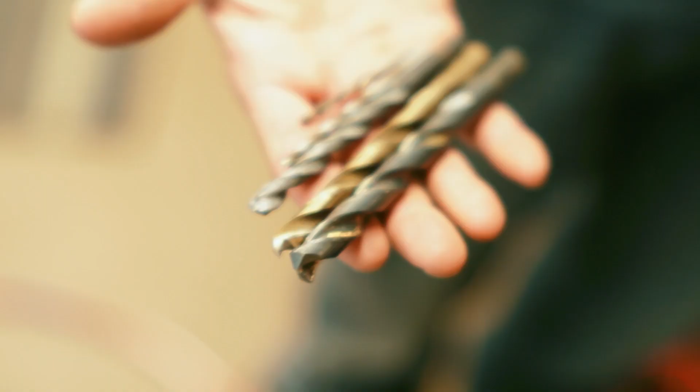Before we get into hanging it on the wall and taking all of our measurements, I want to talk about what tools you're going to need. The basic things that you're going to need are a drill. The drill is going to need drill bits, and we're going to use them for pilot holes for hanging the brackets and the UniStrut and this kind of thing. We'll get into the size of the pilot bits that are required and the torque values and all of that stuff later. But additionally, we're going to be using a voltmeter. You got to have one of those on every project like this.

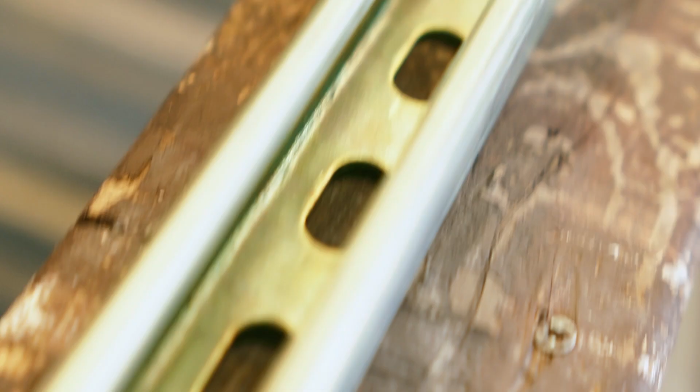We're going to be cutting UniStrut, so I'm also going to be using a reciprocating saw. And I've got a couple of files, rasps, and a Dremel tool for neatening up any burrs that I might end up with on the edge of cutting the UniStrut, because let's face it, a reciprocating saw gives you far from a clean cut. But it's going to be the quickest way to get this thing into 2 even pieces so that we can start taking measurements and getting them on the wall. We're also going to be using a punch-out tool to put the knockouts into the gutter so that it lines up with the knockouts on the inverter.

Additional things that you will need include screwdrivers with various bits. We've got a couple of hex screws associated with putting the gutter together, and a handful of flathead and Phillips bit applications on the various breakers, terminals, bus bars, and that kind of thing. So you want to be sure you have a full socket set. You want to have a screwdriver set. You want to have a drill with your drill bits. We're going to look at a couple of different ways to measure out and find studs, but a stud finder is a good tool to have in your kit.

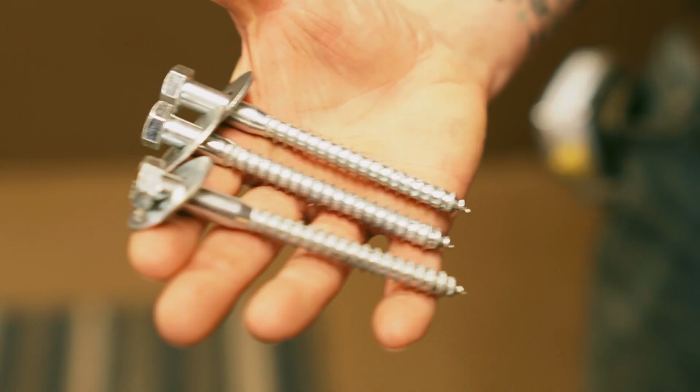In addition to the tools, there's also going to be some hardware that we need to account for. The hardware to mount the UniStrut onto the studs of the wall, and then the hardware to mount the inverter and battery brackets onto the UniStrut. We're going to be using lag bolts for tying in to the studs, and these are 3-inch lag bolts because we're using 2x4 studs as the wooden framing member that we're tying into. We don't want for our lag bolts to go all the way through the stud and pop out the other side. We want it to get a good amount of what is called purchase.

You can see all of this threaded portion will be inside of the wood. This unthreaded portion accounts for the thickness of the sheetrock, and so the total length of this accounts for the sheetrock plus the 3 inches of thread embedded into the stud. So these you need to pick up at a hardware store.

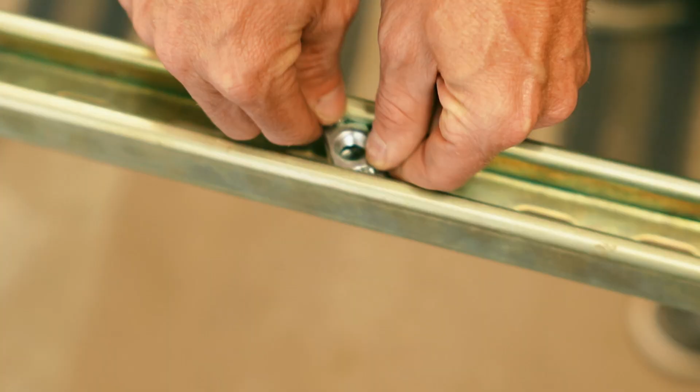In addition, the mounts that we're using for the UniStrut, these are called strut nuts. These ones have a spring clamp on them. And these are cool because you can place them anywhere into the UniStrut once it's mounted, and they push down with the spring and they rotate 90 degrees and get locked into place. So now we can set custom widths on where we're going to be mounting.

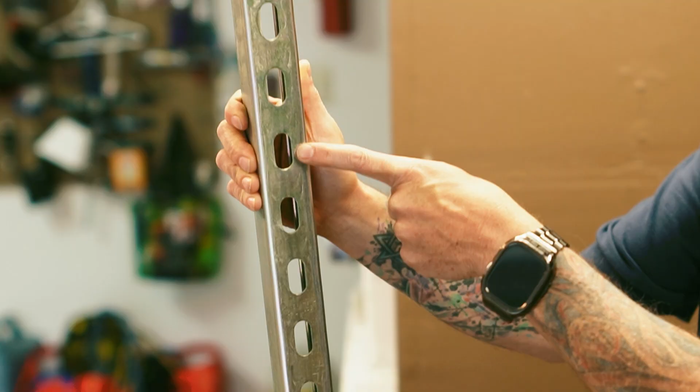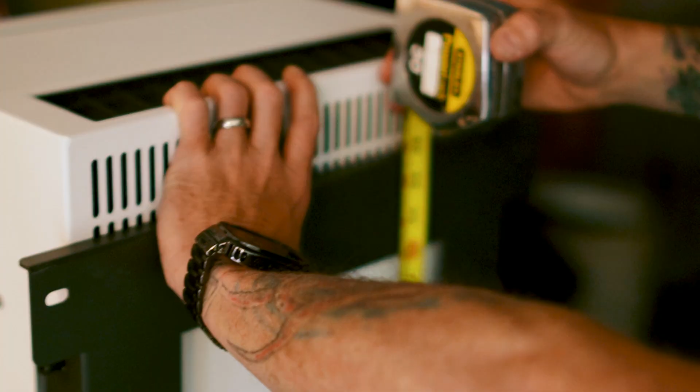As far as how far apart these UniStrut nuts will be, we would use our mounting template. We've got one that came with the inverter. We've got a mounting template that came with the battery. And ultimately, we're just going to line these up with the existing mounting holes on the inverter mounting bracket and on the battery mounting brackets. Whether or not they're directly over a stud won't matter because we're tying into the UniStrut.

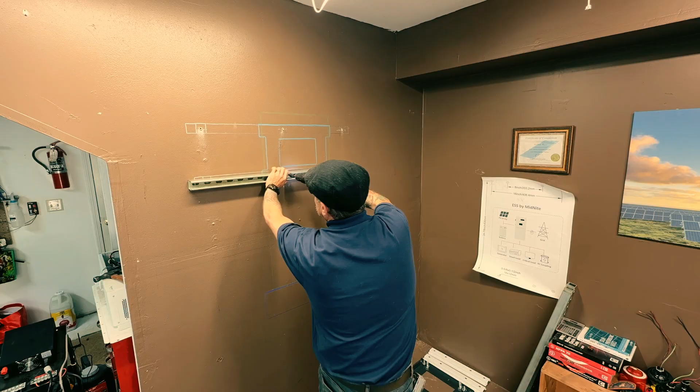We're going to use a 36-inch section of UniStrut so that we can tie into 3 studs in order to hang the inverter and the battery. We're going to try to hang it on 3 structural members instead of 2 to more evenly distribute the weight. So that covers what we need to have for tools. We're ready to get this thing hung on the wall after a few measurements, but we need to address the elephant in the room.

These pieces of UniStrut need to be cut in half. So I'm using a reciprocating saw with a blade that's rated for metal, and I'm using a new blade because I'm going to try to make as clean of a cut as I can. Reciprocating saws aren't always the cleanest of cuts, so we're going to be prepared to file it down. We may need to make some adjustments. I've got the measurement right in the middle, so let's drag it outside and cut her down.

As a reminder, these pieces of UniStrut started out as 6-foot chunks, so 72 inches. What we're gonna do is cut them in half so that we have two 36-inch chunks for the inverter. We're gonna do that again for the battery.

And the reason is we measured out our studs in the wall as being 16 inches on center. So if we're gonna go 16 inches to the first one and another 16 inches to the third one, that's a total of 32 inches that we've got to span between 3 studs. And this will give us a couple inches on either side. Before I get started, I want to point out I've got my personal protective equipment on, including gloves and eye protection.

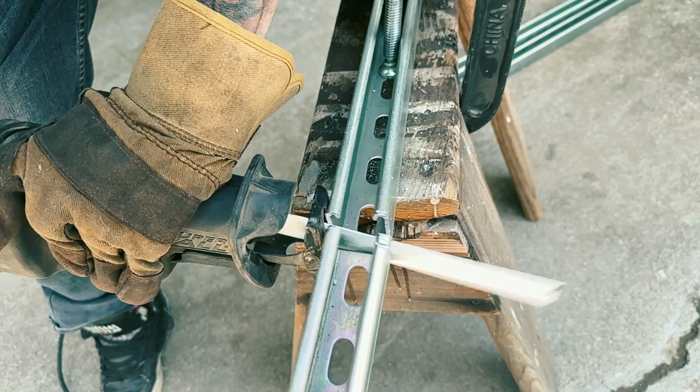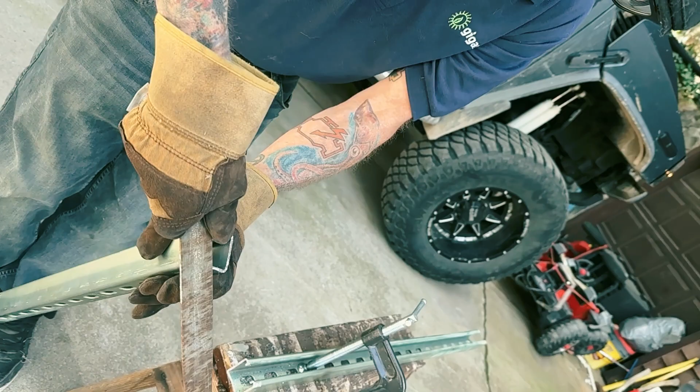Use a file to clean up the ends of those so you don't accidentally get a metal splinter or cut yourself, and clean it up off of your driveway or your garage floor so you don't end up with a metal splinter in the bottom of your foot. Now we've got our UniStrut cut down into four 36-inch pieces, two 36-inch pieces for each piece of equipment.

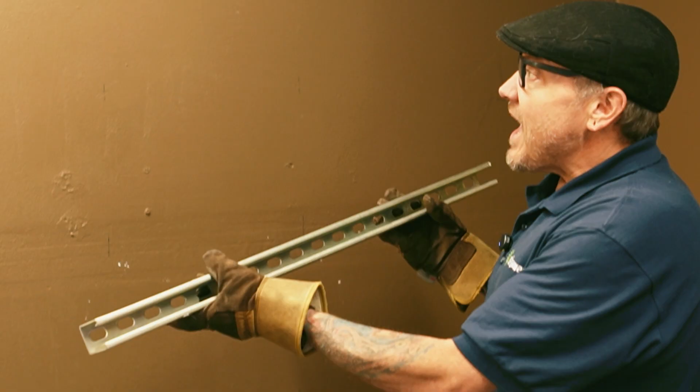So what we're going to be looking to do is to find where our studs are and be able to mount our UniStrut into the studs in a way that the inverter's height and its knockouts and the gutter and everything will line up with the battery, which will be mounted over here.

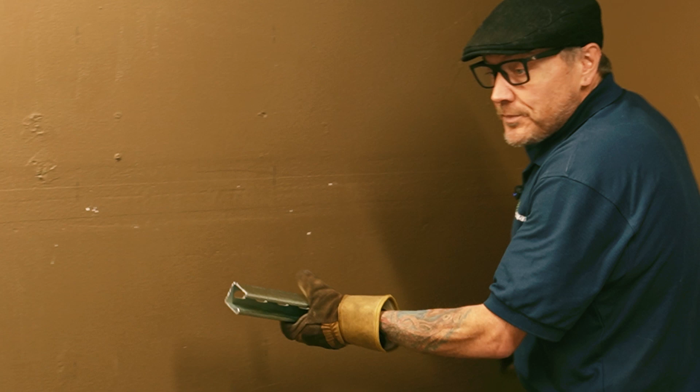So what we're gonna do now is talk about how to find studs and how to attach UniStrut into the studs, including the size of the attachment hardware and the size of the pilot drill bit we're gonna need. Most of you probably already know how to find a stud, but I just wanna go over a couple of common techniques for doing so, so that we're all on the same sheet of music and there's no question.

The standard is to go through and do the old knock test, right? It's gonna be more hollow where there's no wood behind it. If knocking isn't your strong suit, there are a couple other ways. The one that's way more basic is just to use a magnet. I have this little piece of a neodymium magnet, which is just a really strong magnet. The sheetrock is nailed into the studs with steel nails, so we can find them with a magnet. And that will also give you a really solid idea of where a stud is.

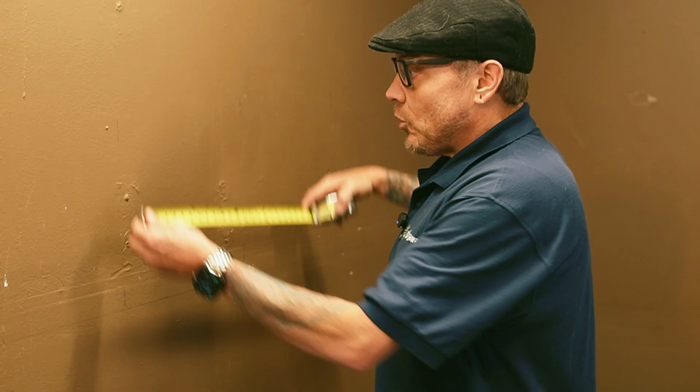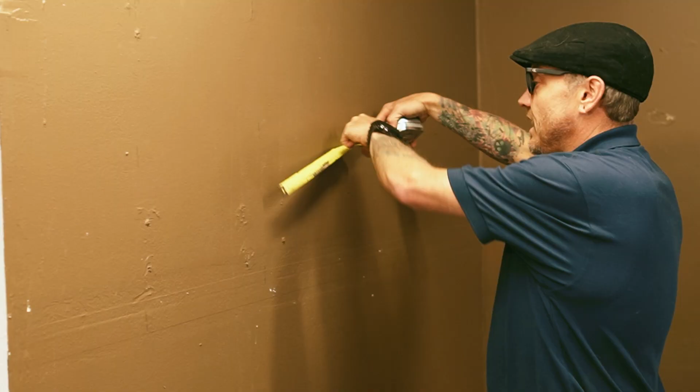We can also get in and measure. And as I mentioned, we're gonna be 16 inches on center here. This is not 16 inches from the edge. We're about 13.5 inches in here. So it makes it even more imperative to be able to find with almost laser precision where your first stud is, because from there, you should have pretty laser precision with where the next stud will be every 16 inches like clockwork. But getting in and finding exactly where they are can take measurements and a little bit of knocking.

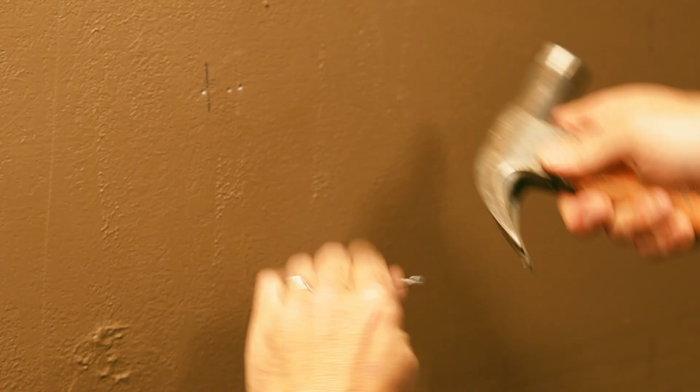What I will do sometimes is use a small finish nail or some kind of a small poking device to probe around where the stud is. I'm not a huge fan of marking up the walls. A person could go through and patch these once they find it. We're gonna be covering this with UniStrut, so I don't think that it's a big deal. In my mind, it's more important to know the direct center of this stud than whether or not I had drilled a couple of test holes to make sure I knew where it was.

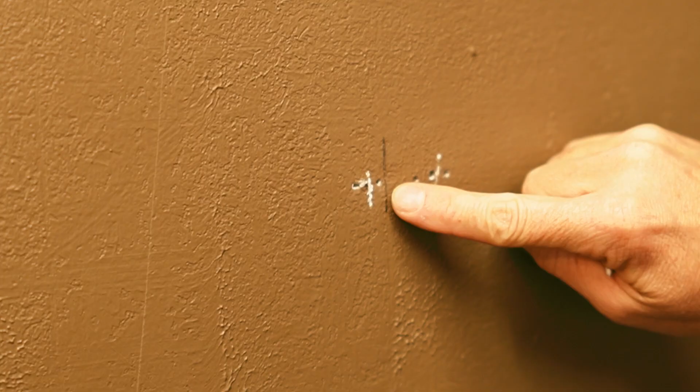Now I know exactly where this stud is, one side to the other, and I can make a pilot hole directly in the middle. Now, if you'll notice this initial mark that I made in pencil, I measured it out, I found the magnetic nail, and still, I was not dead on. If I had gone right here with my lag bolt, would I be in the center of this? No. Now we need to make this measurement in a couple of different places, because just because we find the center of the studs doesn't mean we know where vertically we're going to need to place the UniStrut in order to have the inverter be where we want it.

The inverter, as I mentioned, we want it to have the gutter that we're going to attach interface with the knockout on the battery. Some other considerations are how high off of the ground do we want to have the inverter display, for example. This is purely aesthetics, but this is where we get in and decide what our project is going to look like going forward for the entire life of it. So you have a lot of freedom here to be able to get in and really make this exactly what you want. So take time and do it right.

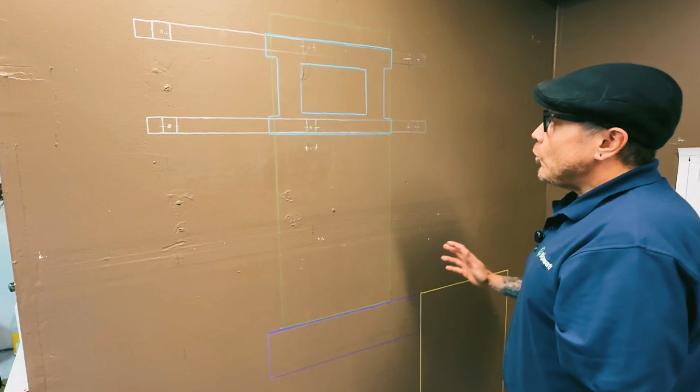I had mentioned that we needed to take a lot of careful measurements. Well, I've gone ahead and done that. With the template in place, we're going to be able to go through and just lay equipment down over the top of it. Now, this isn't something that you will normally see installers doing. I've done this for your benefit so that we can get in and try to visualize how everything will go together before we do it, so that we set better expectations for ourselves on what the process will look like as we're going through it.

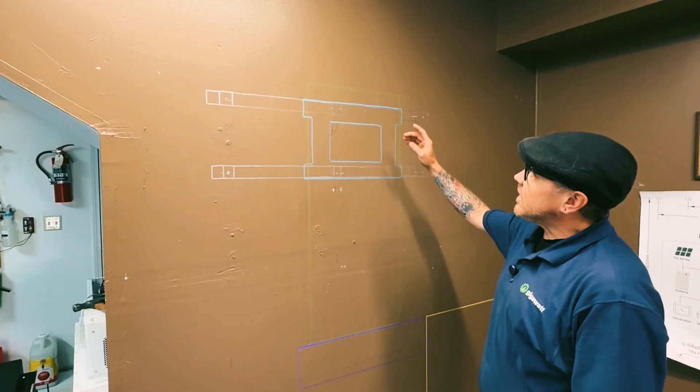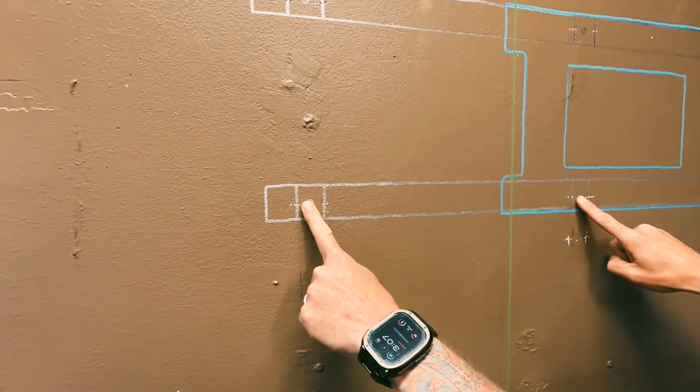I've taken and marked out where our two 36-inch sections of UniStrut are going to go. I've done these in silver. I've also put on the MidNite All-in-One inverter mounting bracket. You can see that the studs that we're going to be attaching into, 3 of them for each piece of UniStrut, I've already gone through and found where the exact center of them is. You can see my little pilot holes kind of around each one.

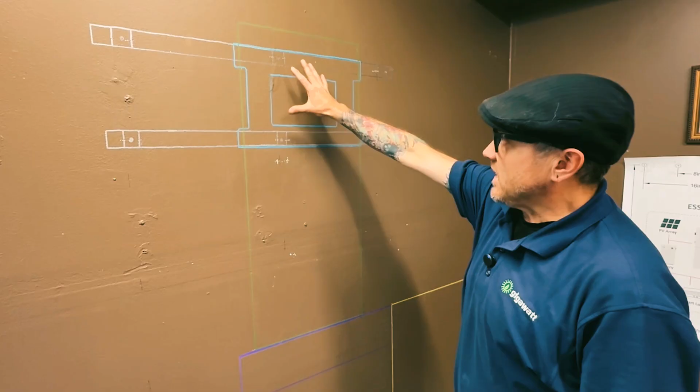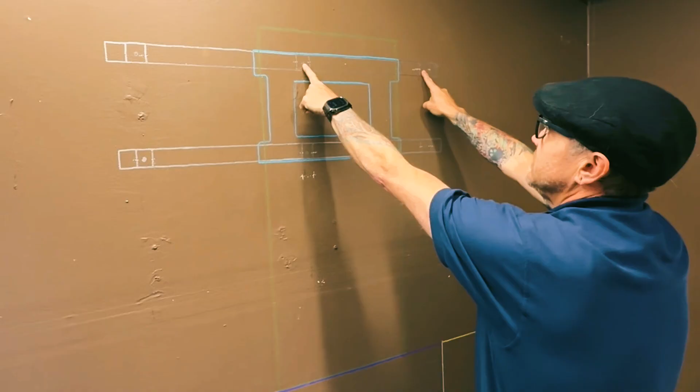One thing that's important to note here is we're going to be tying into these 3 studs, but for where we want the inverter to be with respect to where the battery is going to sit, it's not lined up with where the studs are, right? We want the inverter bracket to be here so that it lines up with how we want our wall to look. The inverter bracket has the pre-drilled holes here, right? So if you were going to tie in, you would have to either have your inverter be here on these 2 studs or over here on these 2 studs. So another thing that the UniStrut does is gives us the ability to be flexible in where the inverter is placed on the wall.

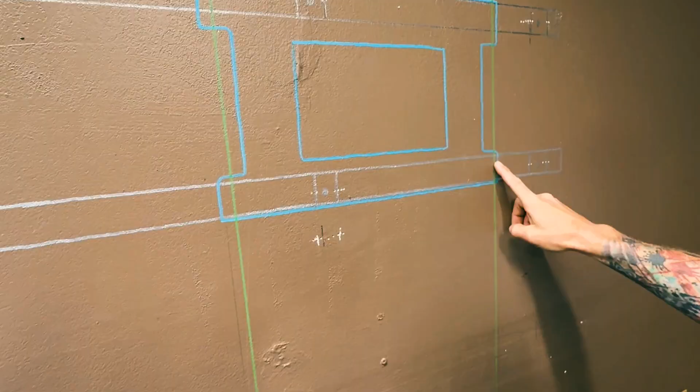Above the MidNite All-in-One inverter bracket that we have here in blue, you can see 2.5 inches above that is where the top of our inverter is. So we used the dimensions of the inverter and laid it out in green here so that we have a solid idea of where the inverter is physically going to sit. Down here in white, I've put in where the gutter assembly is going to go. I don't want for it to be an open gap where you can see the wires. The intent here is for the battery and the gutter to be essentially as seamless as we can get. Fit and finish is what I'm going for here.

And the same is true of the bottom of the inverter. Once we get the knockouts in the gutter for the inverter, we'll need to then consider the knockout from the side of the gutter and into the battery. That's going to give us the ability to have all of our wiring between the 2 things be concealed.

If you're a do-it-yourself person, there's a good chance that putting together a gutter assembly is going to be more cost-effective than buying the conduit. If you've never done it before, buying the conduit bender, wasting a couple sticks of pipe, learning how to do it and bending them to the wrong angle and not being able to bend them back without weakening the pipe. There's an art to conduit, and there's going to be an art to getting this gutter fit and finished as well. And it's important to know what the options are. So the gutter is going to be what we're going to focus on once we get the inverter and the gutter on the wall, battery, then we're going to be doing the wiring.

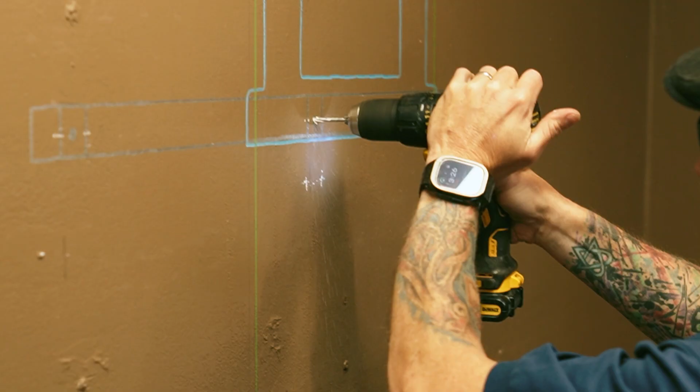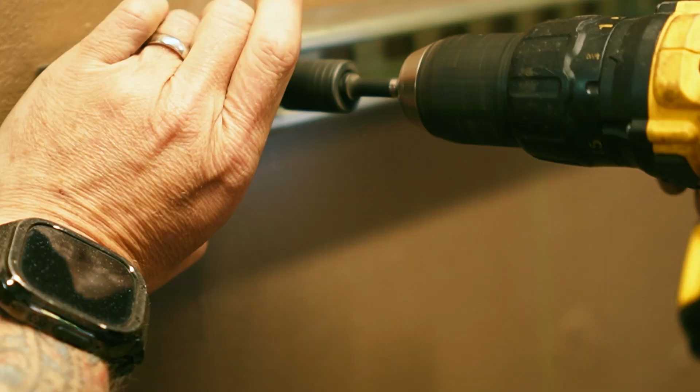Now that we've got the pilot holes drilled, we're ready to put the UniStrut in place. Before I tightened everything down, what I ended up doing is taking the inverter mounting bracket and attaching it onto the UniStrut while the UniStrut was still a little bit slack from the wall. And so I dry fitted the bracket onto there, and it allowed me to have the UniStrut be in the exact configuration it needs for the bracket.

From there, I was able to tighten up the lag bolts on the outer sets of studs. And then of course, I have to remove it now so that I can tighten down this inner stud, upper and lower, which I've done. And now we're gonna reseat our strut nuts and attach our inverter bracket on and get ready to hang the inverter.

3 of the bolts fitted in pretty nicely. This 4th one is a little bit off. Despite taking careful measurements, things don't always lay out exactly as you'd like them. I'm using a clamp to try to line up the threads.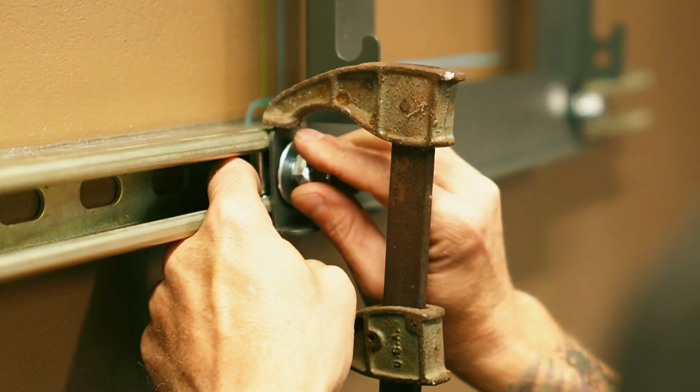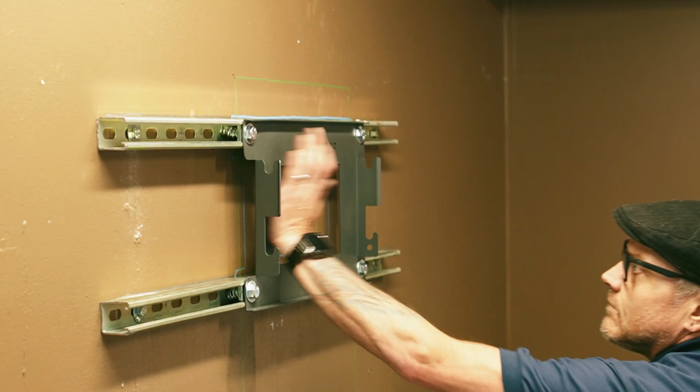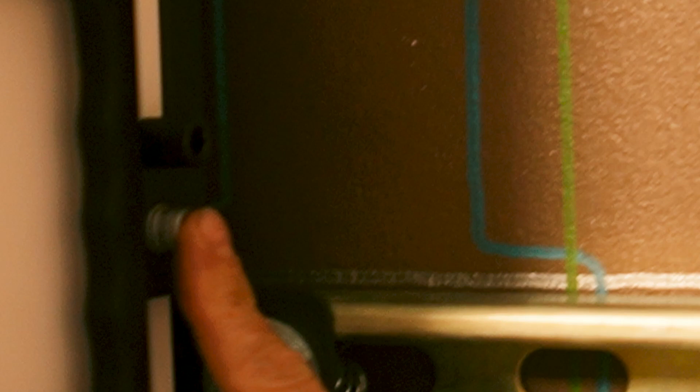This is the set screw that keeps the inverter from being lifted out of the position that it's in. And then there's this threaded screw here, holds everything together so that you can't pull out or lift up, to keep it permanently seated in the bracket. And there's only one on one side. There isn't one over here. Finally, after all of that drawing, planning, cutting, and measuring, now it feels like we have some real progress, and I'm really confident with how well this thing is attached to the wall.

So I wanted to just touch briefly on what it would look like adding in a second battery if we ever got to that point. This is where our battery is going to go here, right? And if we wanted to add in a second battery, where will we put it? Over here? Maybe the battery could go here. Except this is a garage door entrance, and this is too close to where a vehicle could impact it. So that area is out. Over here, we have a different spot. We're gonna put the one battery here. Maybe we'll just put another battery over the top of it.

Except I don't like that because batteries are gonna let off some amount of heat, right? This battery will have some convective heat loss. And so whatever convective heat loss it has is gonna end up in a battery that's up here. So now you have 2 batteries operating in parallel that are literally never the same temperature. That's not how you get longevity out of batteries. So we can't put this battery above the other battery either.

So probably the only option we have is going to be over here. Here, we'd be able to manage our 10 to 12 inch distances for the corners. And then what we would use would be a corner gutter that would allow us to tie in the 2-inch knockout on the top of the battery and be able to feed it through to the 2-inch knockouts on the top of this battery and back over. So we'd be able to accommodate all of the battery to inverter cables in 2 sections of gutter. And I would really like that. The batteries would all maintain the same temperature.

The only thing there is one of these is a lot further away than the other. You're gonna have to find a way to take up the slack of the closer one because its battery to inverter cable length has to be the same as the battery that's further away. The inverter isn't gonna tolerate having different lengths on those wires. We can't have a 3-foot battery to inverter cable and a 7-foot battery to inverter cable and expect those batteries to always play nice with each other because they won't. Your cycles are gonna be super erratic. One battery is going to end up being completely turned off before the other one. These inconsistencies and differences and disparities, this is where the lack of longevity comes from.

That's why working with a professional design team is so imperative. There's all these little nitpicky things that need to be accounted for, and it's so hard to try to take it all in one go. I mean, your best bet is to have somebody who is a professional who is used to looking at these things be there to advocate for you along the way. They keep you from falling into the pits. You can't just pick out a list of parts or copy and paste a list of parts from Reddit and then expect everything to fall together the way that you want it to.

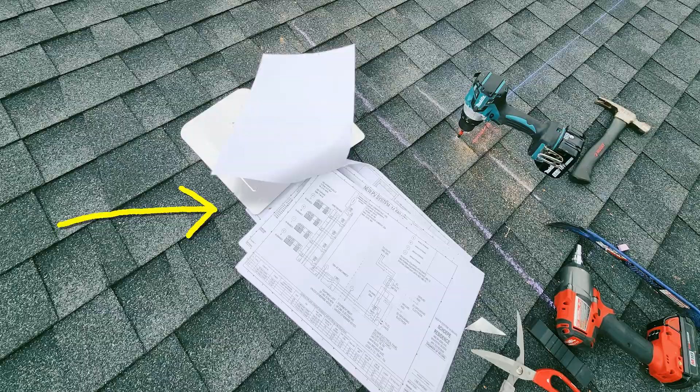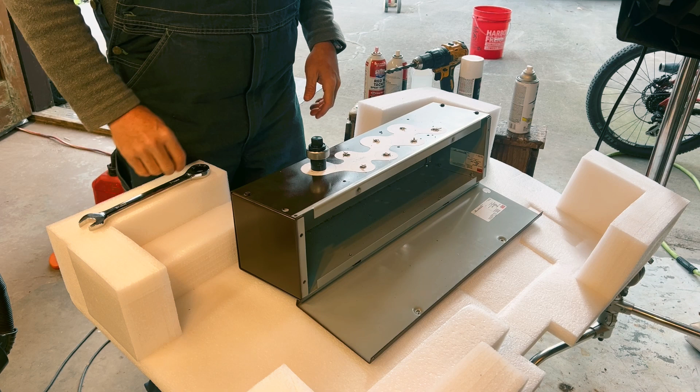Today we're using this knockout punch kit to attach this gutter on the bottom of our inverter. You can see we're starting with the knockout template here. We have to drill it out with a pilot hole, then use the smaller punch to make a punch big enough to use the bigger punch. So it just takes time. It's fun though. I've got the holes in the gutter all knocked out and pretty well lined up.

I'm going through with the punch and trimming up a couple where it wasn't really laser precise and I wanted it to be. But here's these bushings that come with the thing. The plastic bushings penetrate through the knockout on the inverter and the knockout I've made into the gutter and make a totally code compliant metallic raceway without having to screw around and buy a million conduit fittings, at least for the inverter gutter connection. So pretty cool.

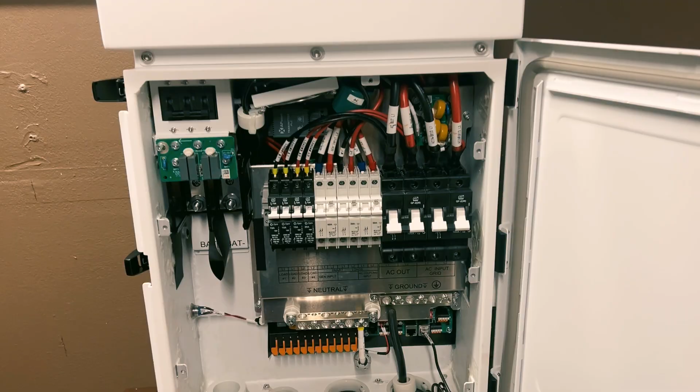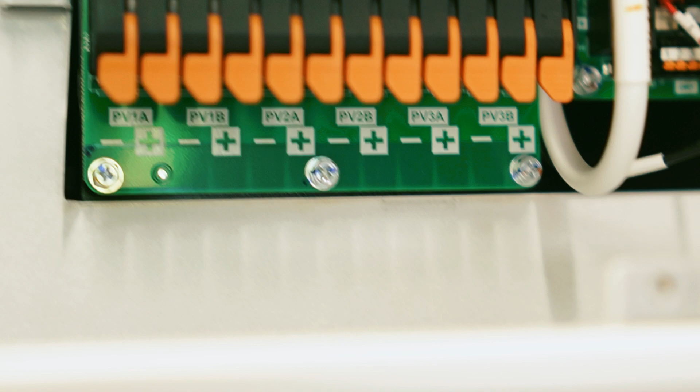Inside the MidNite All-in-One inverter, there's a lot going on in here. I want to point out a couple of things in here to kind of orient everybody with what's going on. If you look under here, it says PV1A, and that holds our PV strings in place. This is the DC that's coming from our strings of solar panels. The MidNite All-in-One inverter has 3 MPPT inputs for solar. Each one of them allows you to go up to 600 volts.

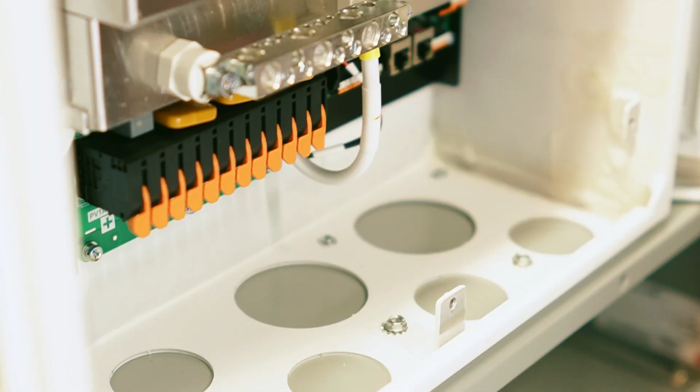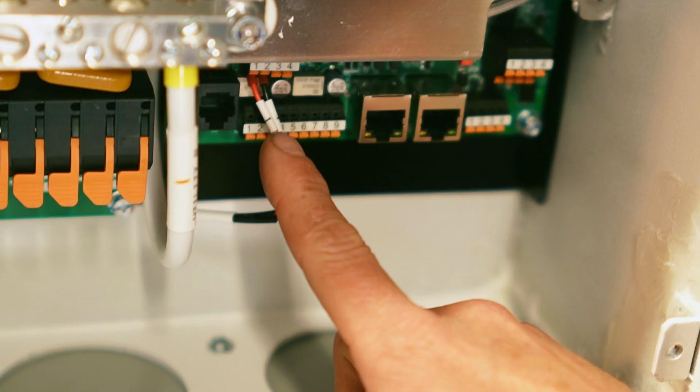Right next to where the solar panels come in is all of our communication gear. Here we can plug in our rapid shutdown to the switch on the outside. We've got dry contacts here for being able to control relays. Our generator wiring will come into here. Our CT meters plug in here. Our battery management system for our battery plugs in here. So this is the communication hub for everything that's going on inside of the MidNite here. RS-485 terminals allow you to do some trick and fancy monitoring things. We're going to explore those in a future video.

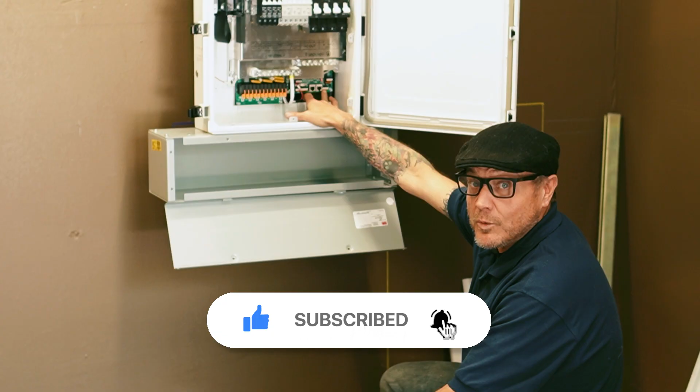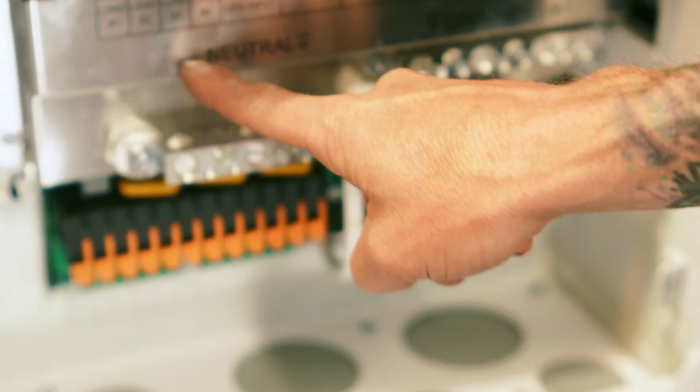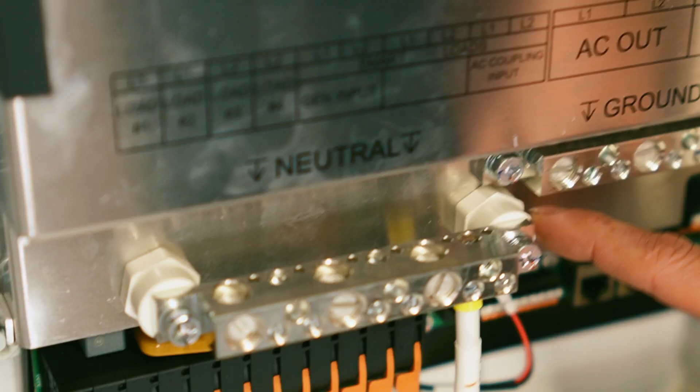Here's where we have our parallel connections. If we have more than one inverter, we've got to run a set of conductors between the 2 inverters for parallel. So all the communication stuff happens here. Just above that, we start getting into our AC stuff. This is our neutral bus bar. It says neutral. It has a white wire coming into it. It says utility neutral on it. You will notice that it's on these white standoffs. This is what isolates the neutral bus bar from everything that's metal in here, from the chassis ground. The neutral is a floating bus bar.

And if we move just to the right of it, here, this is the ground bus bar. And by comparison, you'll see that it does not have white insulators on it. It is connected directly to the metal chassis of the inverter. So neutral and ground are right next to each other, but they're not interchangeable. Ground is ground, and neutral is completely isolated from ground.

With this in mind, every system needs to have a neutral to ground bond in order for the inverter to function. If you're tied into grid power, it's code that you have a neutral to ground bond at your main panel. If you have a backup generator that backs up your whole home, then it's likely that you'll have your neutral to ground bond be in your transfer switch. It might be in your generator, but you have to have one by code. You cannot have more than one neutral to ground bond. But for those of you who are off-grid, it's worth noting this inverter and other transformerless inverters will not function without a neutral to ground bond. That's all for these bus bars down here.

Let's take a look at the breakers and what we have going on there. The MidNite inverter comes populated with a huge amount of overcurrent protection. MidNite breakers are 100% duty cycle rated. Your standard breaker is only rated to have current moving through it at 80% of the breaker rating. If it's 100 amps, it's rated for you to put 80 amps through it.

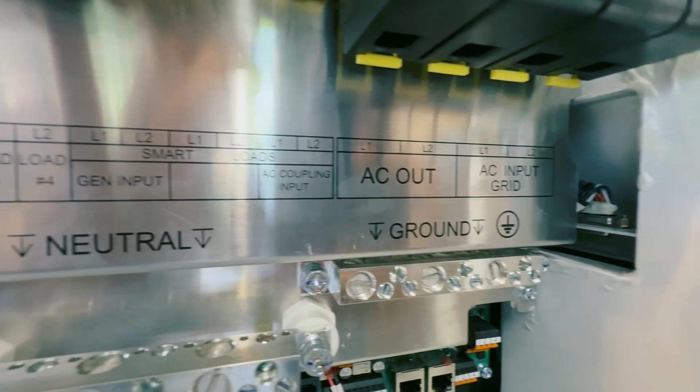It's a 2-pole breaker. We can get in and see down here it says AC input grid, L1, L2. That's leg 1 and leg 2 in electrician talk. Sometimes they'll call it hot 1 and hot 2, or they'll call it phase 1 and phase 2. Those are all talking about the exact same thing.

Now, in addition to the AC input grid label on the bottom of the inverter, we can also see on the top, it says AC in grid L1 and the wire is black. Same thing for L2, AC in grid L2 and the wire is red. So we can kind of make sense, okay, grid comes in here, black and red, and it goes off up into the inverter, okay?

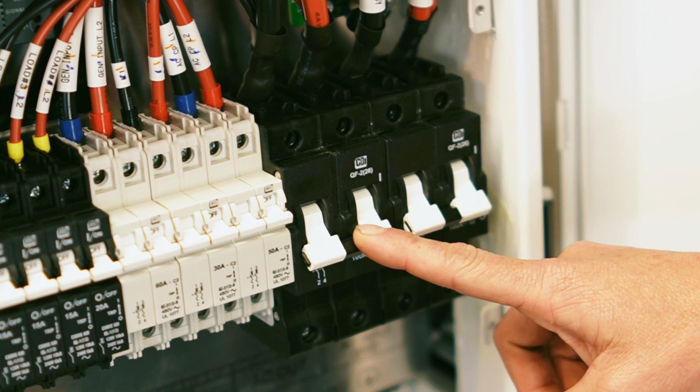Our AC output that comes out from the inverter to our backed up loads, our critical load sub panel, if you will, right next to it, the exact same 100 amp breaker. 100 amps, 2 poles, leg 1, leg 2. This is our AC output. So right next to grid input is AC output, right? Our input from grid, our output to the loads that we want to stay on when utility power fails.

When you're bringing in your wires from utility, you should have 4. You should have a leg 1, a leg 2, a neutral, and a ground. So 4 conductors are coming into this inverter. So for the sake of discussion, let's talk about our grid input really quick. This is a 100 amp breaker. So based on that, I know it has to be at least a number 2 copper that's coming in here.

And we would have our number 2 black, our number 2 red. Those are phase wires that come in from grid. The others that come along for the ride are neutral. We've got the same size neutral wire coming from grid, and it lands here at our neutral bus bar. We'll have a ground coming in from grid. It's typically a little smaller than the conductors that are being used, and it lands here at the ground bus bar. So your 4 wires from utility, leg 1, leg 2, neutral, ground.

Our output to loads are going to be really similar. We've got a leg 1 out to our backed up loads, leg 2 out to our backed up loads. And so this is our black and red wire that go to our breaker panel where we're running our loads and things that need to stay on when the grid power goes down. And in addition, they also need a neutral and a ground. That's 4 wires leaving the inverter to go to the loads that you want to back up.

If only I had used a 10 by 10 gutter. If I had used a 10 by 10 by 24 inch gutter, I would have avoided having to stilt the battery out away from the wall. Stand on my shoulders and go with the 10 by 10 gutter. This is 24 inches, so I would suggest a 10 by 10 by 24 inch gutter for a single MidNite All-in-One.

A connection from this MidNite battery into the gutter. I've used a clamp style connector in here. I'm using it for the sake of having a solid raceway. The key here is to take accurate measurements so that you know where your battery is with respect to the wall to be able to line the knockout up perfectly.

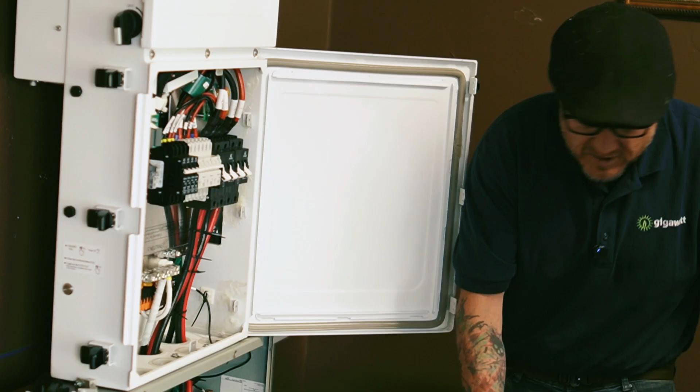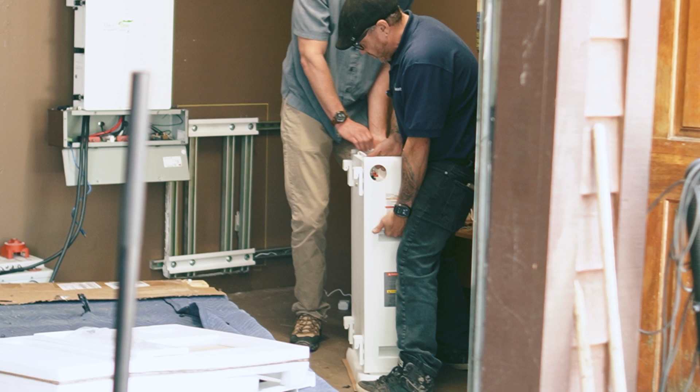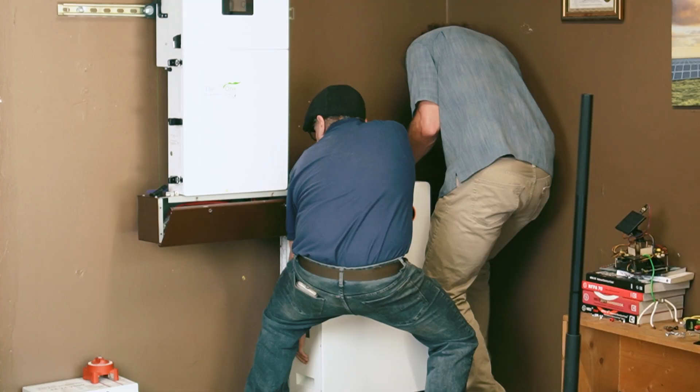I had to move all this stuff out of the way so that we can get this battery wrangled over there. All right, so let's see. There's 2 handles on either side. And with this removed, this is structural. Yeah, I can see that. So you want to try to get a handle and then on this and see if we're able to just... I would say, yeah, and then just try to put it right here. I think we need to try to lift it. Yay. Good job.

So we didn't end up using the floor jack. No. We didn't end up using the hand truck. We didn't end up using the lumber for cribbing. I'm glad that we had all of that. Sure, right. It's always good to have options. I think what you would learn from is 2 reasonably strong dudes can hang the battery on the wall, especially if there's nothing in the way.

So think of like from the unboxing, right? It's on a pallet when it comes in, when they deliver it. It's on the ground. You unbox it, you break it, you put it on its end, you put it on, just like what we did from beginning to end, 2 people could do it. And I don't know how many people are going to take on this project solo, right? You're going to be able to get your neighbor like, hey, Bob, I'll trade you a 6-pack of beer. I need your help. Right. And in your case, you call your brother.

Right. Well, thanks for swinging by today and checking out getting the battery on the wall. Thanks so much, Harley. Yeah. We're going to have to get some more equipment to be able to wire the battery into the inverter. And we're going to drop in another transfer switch in here in the garage so that we can do our 1-to-1 transformer versus transformerless inverters to see which one's actually strongest.